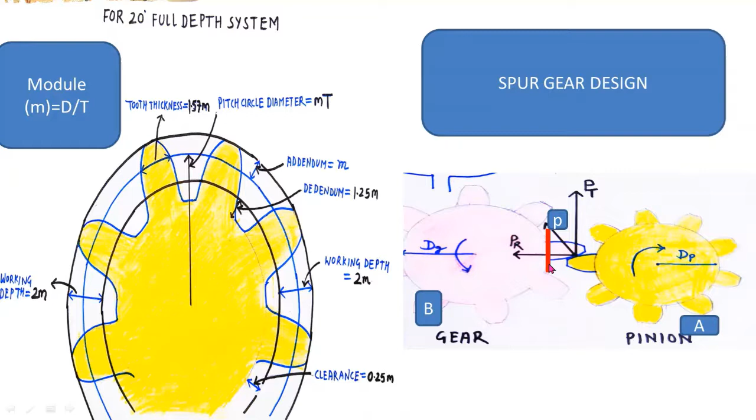So to find module, we establish a relationship between the tangential component of the force PT and the bending stress at this section, that is at the root of the tooth B, and the module is then obtained after solving this relation between PT and the bending stress at the root of the tooth B. Okay, and now let's start the process of design.

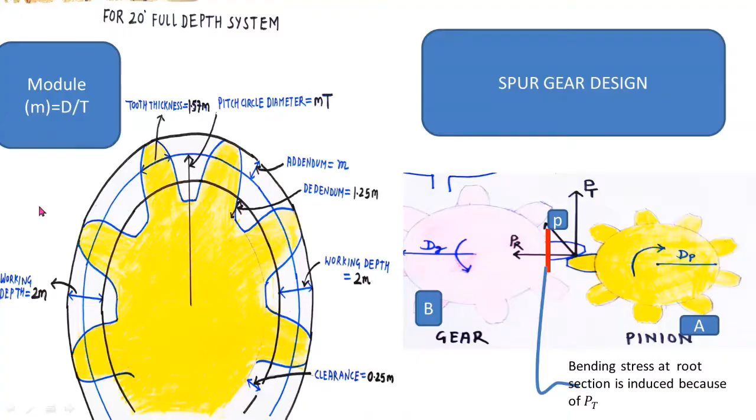Now in the first step, we will assume the material for gear and pinion. Generally, plain carbon steel is used as material of gear and pinion. Here by pinion we mean the smaller of the two gears. For example, you can choose 45C8 as material for gear having ultimate tensile strength, denoted by SUT here, of 630 Newton per mm square, taken from the data book.

Similarly, you can choose 40C8 as material for pinion having ultimate tensile strength SUT of 580 Newton per mm square, taken from the design data book. So plain carbon steel is selected as material, and for gear and pinion we have to write down the value of ultimate tensile strength from the design data book.

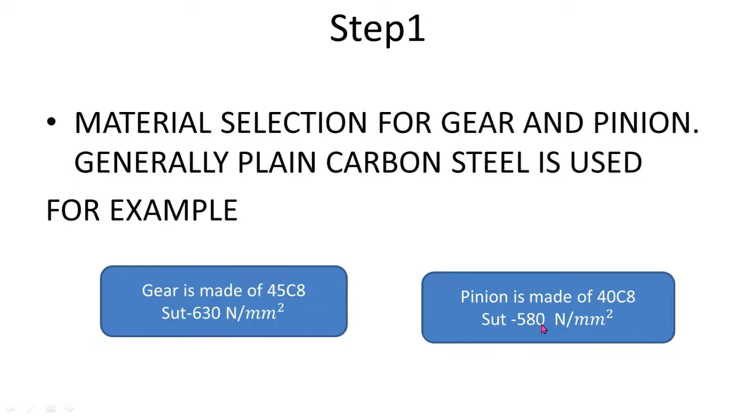Now in step number 2, we will calculate the permissible value of stress for gear and pinion. The highest value of stress that the gear and the pinion can withstand is called the permissible stress for pinion and gear. We know that a single tooth of gear is loaded only at the time it makes contact with another tooth of another gear. Rest of the time it is unloaded. So loading is not steady, it is fluctuating in nature.

So endurance limit is considered as the stress responsible for failure, and endurance limit in case of gear is assumed as ultimate tensile strength by 3. So the permissible stress for pinion can be taken as ultimate tensile strength for the pinion material divided by 3, and the permissible stress for gear can be taken as ultimate tensile strength divided by 3 for gear material.

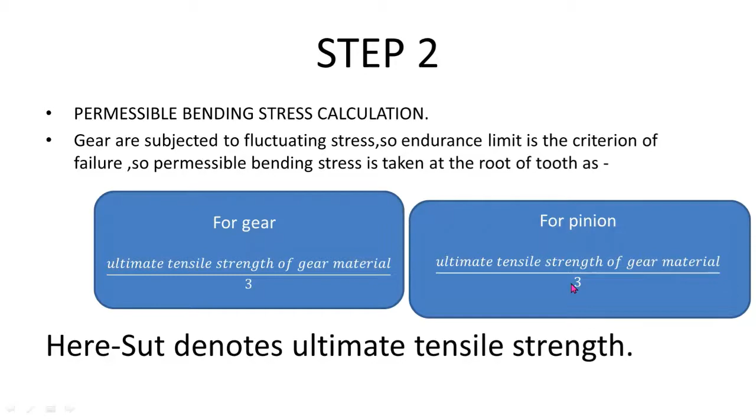Now we will assume which member is weaker. We know that out of two members, pinion and gear, one member will be weaker and one will be stronger. So we always need to find the weaker member, so that we can set limits of design stress for the weaker member so that the weaker member does not fail.

So for that we have to find the Lewis form factor denoted by capital Y as shown. We have to use the table given in the design data book which specifies the value of Lewis form factor corresponding to number of teeth, as shown here on the right side in this table. Here capital T represents number of teeth and Y represents the Lewis form factor corresponding to the number of teeth.

So you have to calculate the value of Lewis form factor for pinion and gear based on the number of teeth on pinion and gear using this table provided in all design data books. In some data books, to find Lewis form factor, certain empirical relations are provided as a function of teeth. Using that also you can find the Lewis form factor.

Now, based on the product of the ultimate tensile strength and the Lewis form factor calculated separately for the gear and the pinion as shown, we have to compare these two products for both members and find out which product is lower, and that product will correspond to the weaker member, and for that we have to follow the rest of the design procedure that I am going to tell you.

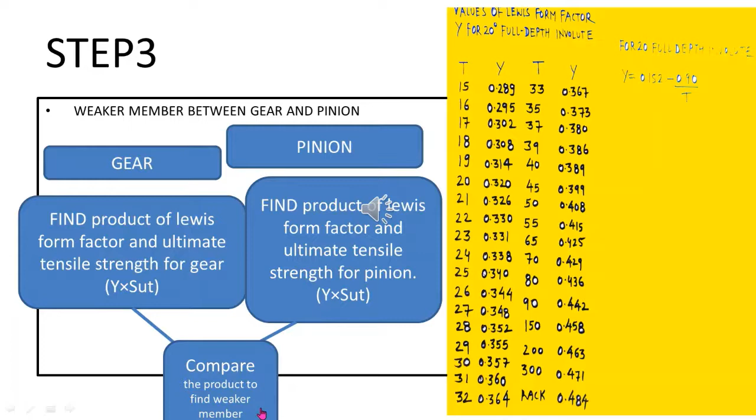Now in step number 4, we will find the tangential component of the force denoted by PT as shown. Because this load PT causes bending stress at the root of the tooth, which leads to tooth failure at the root as shown here. Friends, see, these are two gears, gear A and gear B. Gear A is transmitting power to gear B, and at this instant a tooth of gear A is making contact with a tooth of gear B as shown.

Now at the point of contact you can see the tooth of gear A is applying force P as shown. This force P can be resolved into PT and PR. Here PT is the tangential component of the force responsible for power transmission only. So we need to find out the value of PT and neglect PR.

So PT is given as power transmitted divided by pitch line velocity, which will be equal to P, standing here for power, divided by pi D N by 60, which is the pitch line velocity. So when you substitute the value of D as m times number of teeth, you will get the expression 60P by pi m T N. So PT can be found using this expression.

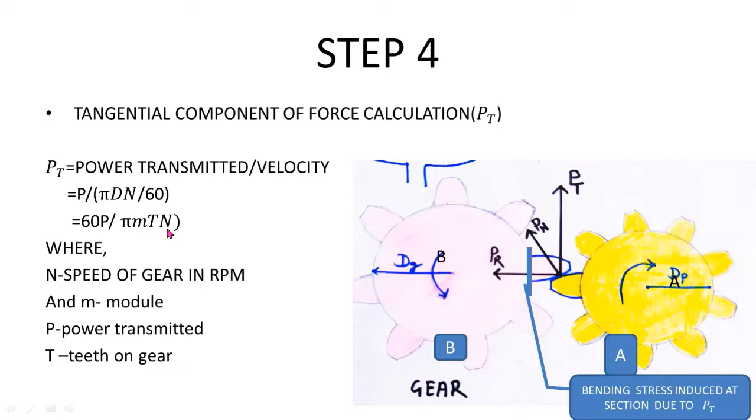Now in step number 5, friends, the tangential component of the force calculated in step number 4, denoted by PT, is not constant. It changes during gear operation because of dynamic effects due to impact and high velocity. So we have to apply some factors to make a correction, and the corrected tangential load is given by the term P effective as shown. This P effective will be responsible for bending failure of the tooth at the root section.

Here, the factor CV, called velocity factor, accounts for the dynamic effect of impact and high velocity. The velocity factor CV can be taken from the design data book using the data shown on the right side. It can be seen that the value of velocity factor depends on the pitch line velocity of the gear and pinion, denoted by this symbol. So using this formula to calculate pitch line velocity, you can find the pitch line velocity of the gear, and based on it you can find the velocity factor CV using this table.

Note, friends, an important point is that most of the time we do not know the pitch line velocity of the gear in the initial stages of gear design, so we can assume the pitch line velocity of pinion and gear as 5 meters per second initially to find the velocity factor CV using this table as shown on the right side.

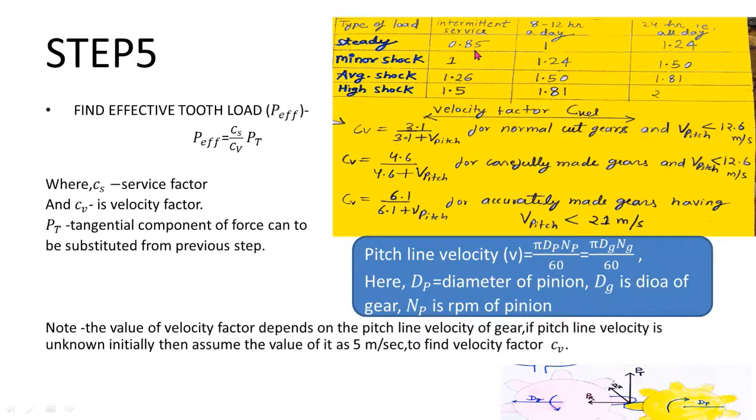Friends, here CS denotes the service factor, which depends on type of loading and number of hours of service. It can be obtained using this table provided in all design data books based on the number of hours of service and the shock involved in loading. As shown here on the right side, using this table you can find the value of CS, that is the service factor.

Now in step number 6, bending stresses at the root of the tooth are estimated using Lewis equation. Here SB denotes maximum value of the tangential force that can be applied at the end of the tooth so that the tooth does not break. In this equation, sigma represents permissible bending stress at root of tooth. This equation is always applied for the weaker member out of pinion and gear.

Now small b is the face width, assumed initially as 10 times the module. Here sigma is equal to the permissible value of stress for the weaker member taken from step number 2 as ultimate tensile strength of the weaker member divided by 3. And y is the Lewis form factor for the weaker member as already calculated from step number 3. So after substituting all these things in this equation, you will get beam strength SB as a function of module only.

Now we will come to step number 7. In step number 7, we will equate effective tooth load as obtained in step number 5 with the beam strength obtained in previous steps. So you will get this equation as shown. And solving this equation, find the value of the module M. So when you get module, then almost the problem is solved.

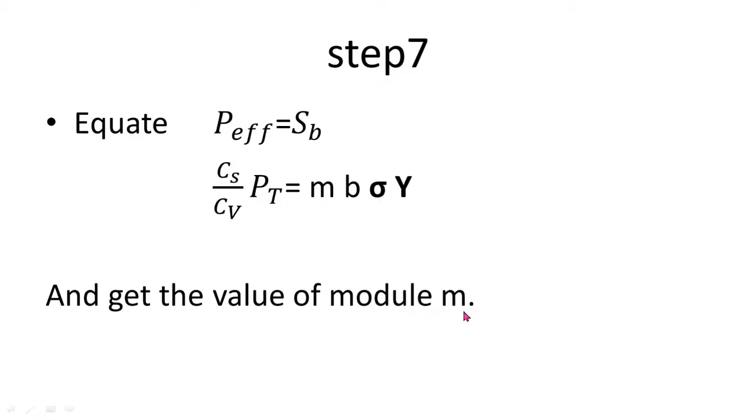Now in step 8, using the value of the module obtained in the previous step, we will find out the diameter of pinion and gear using this equation of module. Here dP and dG are diameters of pinion and gear respectively. TP and TG are teeth on pinion and gear respectively. And using this equation of pitch line velocity, we will find pitch line velocity in point 2 as shown.

In point 3, we will find the tangential component of the force denoted by PT as shown using power and velocity taken from above as shown by this arrow. And after that, we will find velocity factor CV using the pitch line velocity taken from above point 2 using this table on the right side.

Then we will find out the effective tooth load given by P effective is equal to CS by CV into PT as shown by this formula. Here PT is taken from point 3 as shown above, CV is taken from point 4 as shown above, and CS is taken from step 5 discussed earlier.

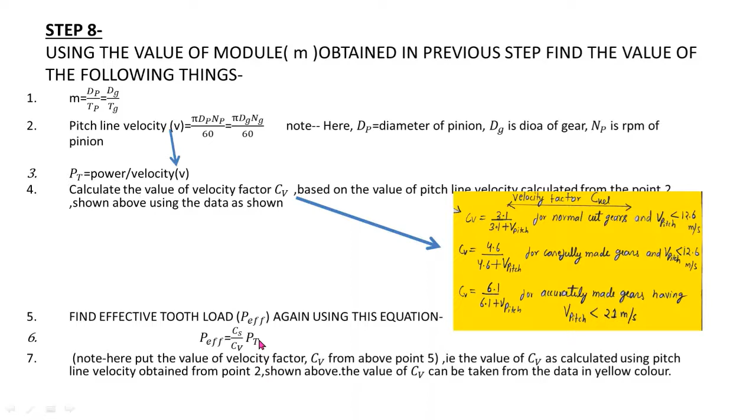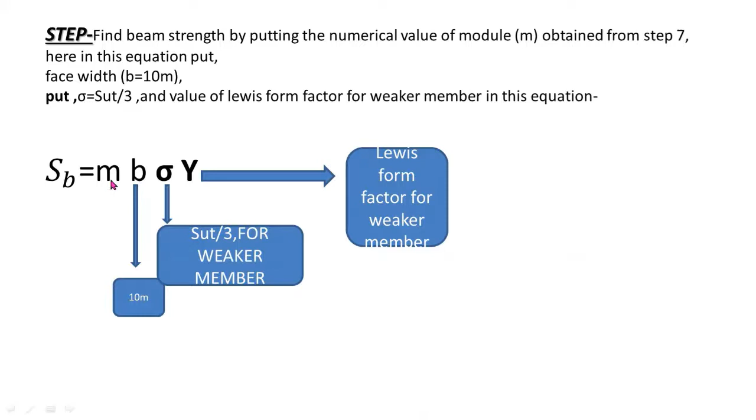In step 11, we will find out beam strength SB numerically by putting the numerical value of the module obtained in step 7. If the beam strength SB obtained in step 11 comes out to be greater than the effective tooth load, then the design is safe. Otherwise, we have to go back to step 6, where we earlier assumed the face width b equal to 10 times the module.

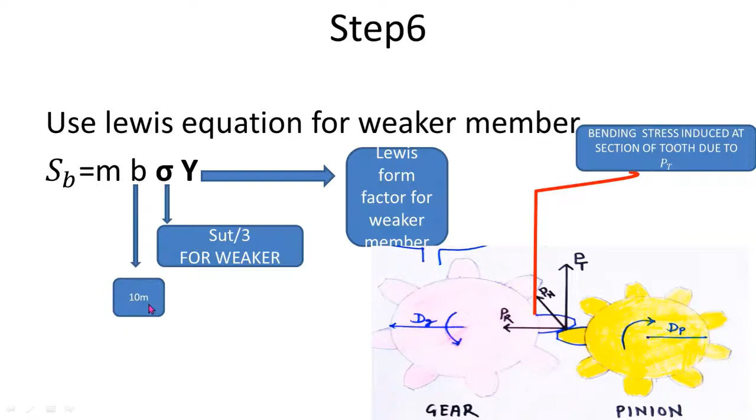Here the value of b is taken as 10 times the module, but if the design is not coming safe, then we will assume b as 11 times the module this time and follow steps 7, 8, 9, 10, 11 again, and check whether this condition for safe design is satisfied, where SB, the beam strength, is greater than the effective tooth load. If this condition is satisfied, then the design is safe.

At last, find gear dimensions using the value of the module, because all the gear dimensions depend upon the module, as you can see from this figure.